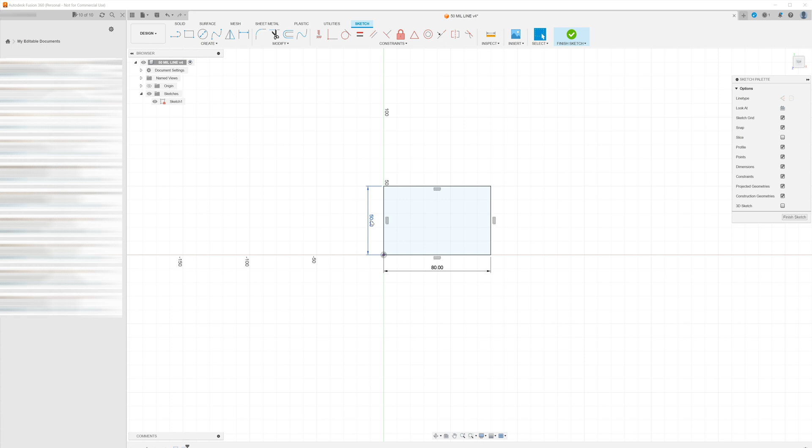So I've got this drawing here, well, this body, and as you can see it's made up of a 50 by 80mm box that I've extruded a bit. So this is what I want to print.

One thing to keep an eye on is the orientation of how you want to print it. So for me, I want to take this top view, so I've got the dimensions of this box to draw from.

Then I'm going to go to Design, Drawing from Design. This window will pop up. Sometimes the OK button will be grayed out and you have to change what the drawing is going to be created from. I've gone full assembly, so you might have to change it.

I'm going to be printing on A4 paper, so the printer is going to be A4. So I'm going to choose this, which I think is landscape. Yep, landscape A4, and I'm going to press OK.

Now it's going to ask you to place your object or your body or your sketch or whatever you're trying to print. So you just place it.

And remember from earlier, I mentioned that I wanted the top view, so I'm going to change my view orientation to top. And here's the important part: you just change your scale to 1:1.

Press OK. Now, if you were trying to save this as a PDF, you won't be able to unless you have the paid version, which, if you're watching this, I'm guessing you don't.

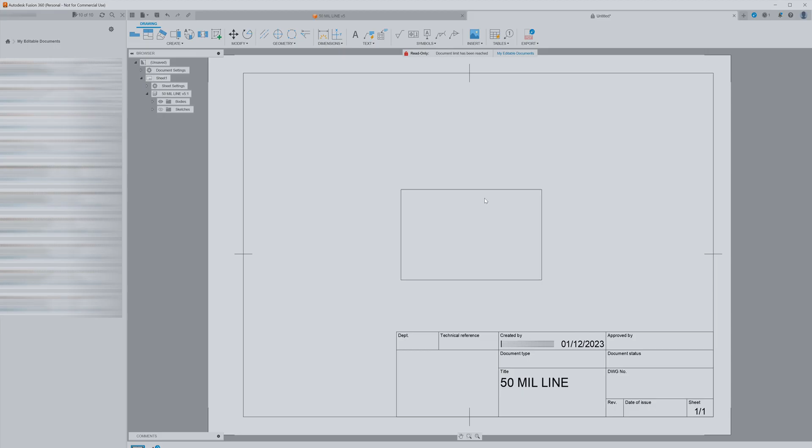So there's a way around that. You can go File, Print, and do Microsoft Print to PDF, and make sure your orientation is the same as your page in the background. So landscape, and the main thing is to keep your scale to 1:1.

And if you hit print, it will create a PDF, and so on.

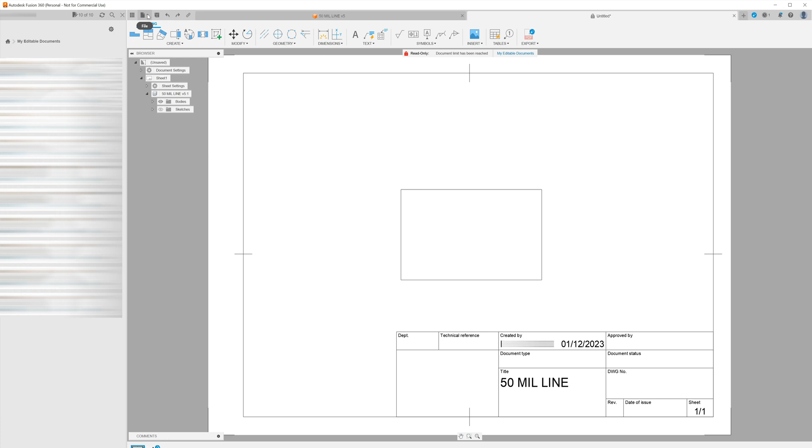But I want to print directly to my printer right now, because I want this in my hands. So same thing, print. I'm going to choose my printer, make sure the scale is 1:1, and landscape, and then hit print, and that's it.

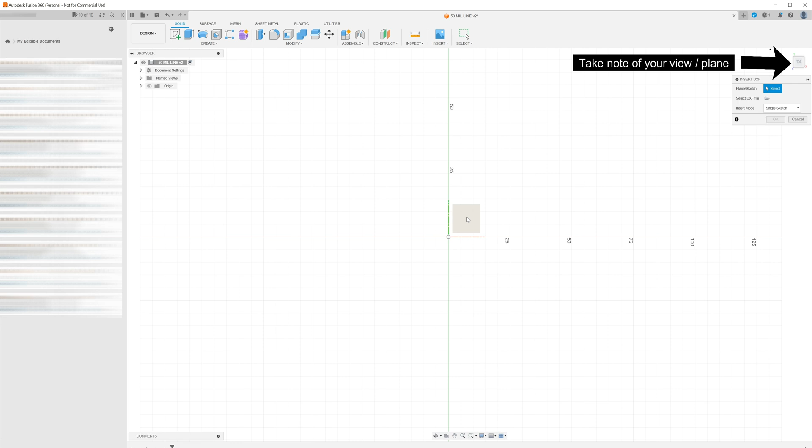If you're trying to print a DXF to scale, go to Insert, DXF, browse for your file, select from my computer, select your file, select the plane, and that's all okay, so just okay.

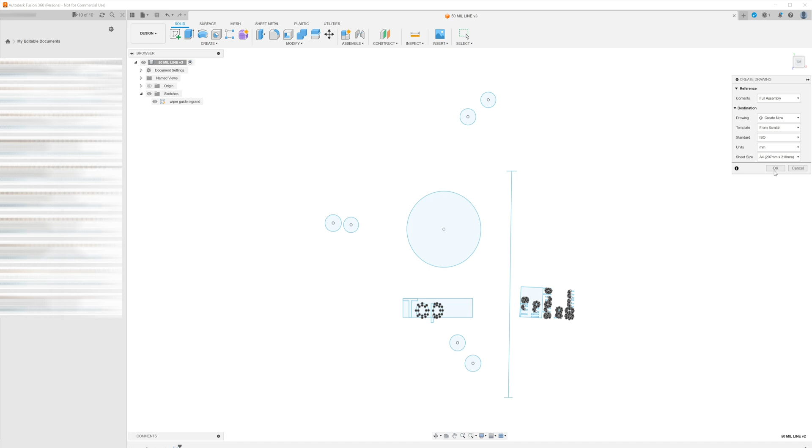And now we're going to go to Design, Drawing from Design. Again, I'm leaving it on full assembly, A4, because that's what my printer is. That's okay.

And remember from before, my orientation was top. My scale is 1:1, yep. And now it asks me to place the drawing.

I've placed it, but this is a bug within Fusion, or maybe there's something I don't know, but it seems to be a bug because I've clicked it and this little square comes up, and when I press OK, then my actual DXF drawing comes up.

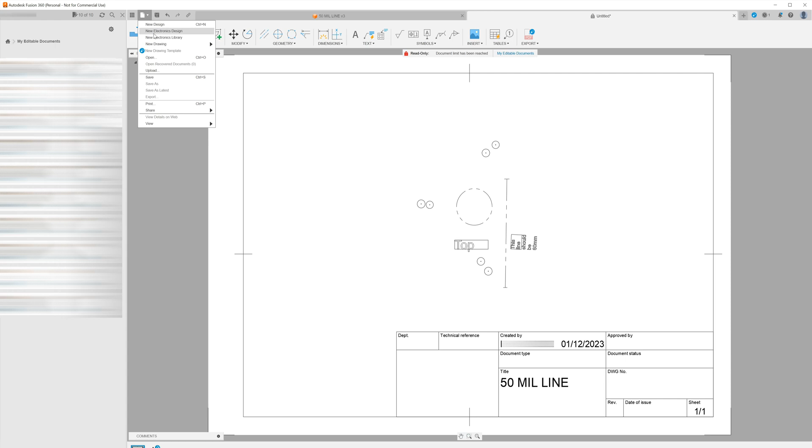And then it's the same as before: File, Print, scale 1:1, and match my orientation, landscape. That's it, print.

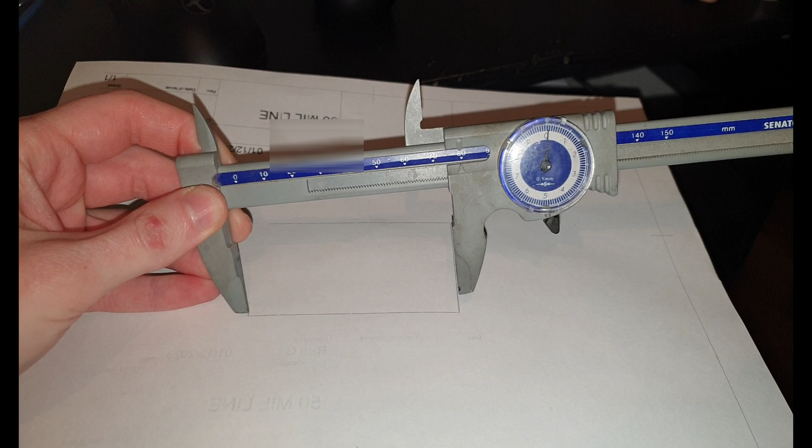And here you go, this is printed out, and as you can see, 80mm.